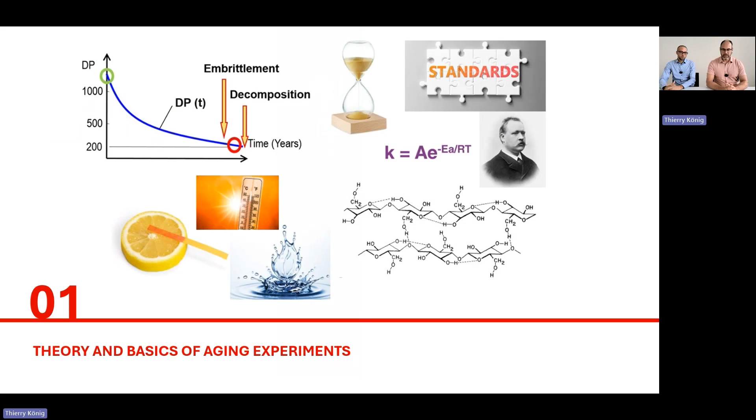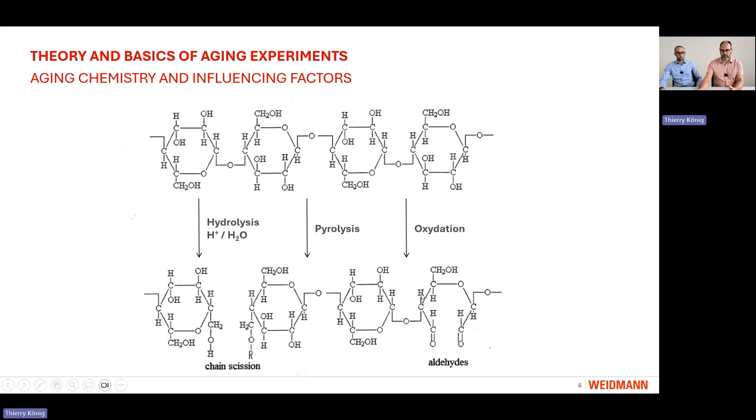The first name that is dropped when it comes to aging chemistry or reaction kinetics is Svante Arrhenius. Swedish man, born about 150 years ago. He was Nobel Prize winner in 1903, and his main interests were kinetics, electrolytic dissociation, meteorology.

So he was one of the first men that mentioned the greenhouse effect already more than 100 years ago. He also studied physiology and cosmology.

What was his main achievement? It is the so-called Arrhenius equation. The Arrhenius equation describes how fast a chemical reaction happens. Aging of cellulose is also a chemical reaction, and we can describe this very nicely with this equation here.

So we have here K, which is the velocity of how fast this reaction happens. We have EA, the activation energy, meaning this is the first energy that you have to put into the system so that the reaction will happen.

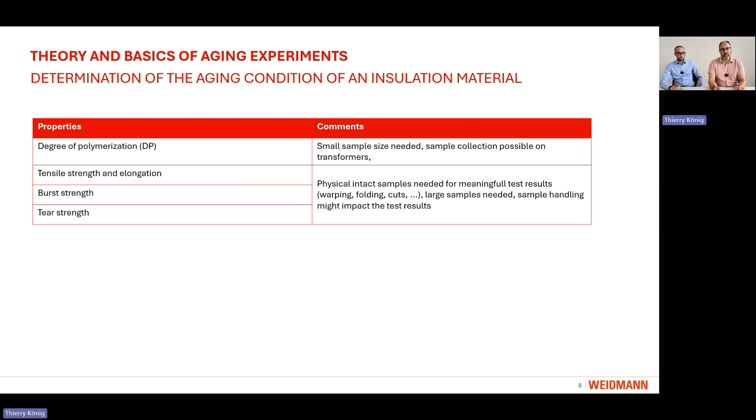And the other drawback of this property is that large samples are needed. So for a tensile strength, we need a paper strip of about 10 centimeters length.

Since the degree of polymerization is quite easy to measure, this has been the property of choice for estimating an aging of a cellulose molecule.

So the cellulosic insulation is made by cellulose fibers, which consist of cellulose molecules. The cellulose molecule is a chain molecule consisting of several identical single units. And the degree of polymerization is a measure for how many of these single units are forming this long chain.

So for example, when we have a degree of polymerization of 1200, then we have 1200 units that form the cellulose molecule. It is a measure for the molecule length, but not for the fiber length. So there is no correlation between DP and fiber length.

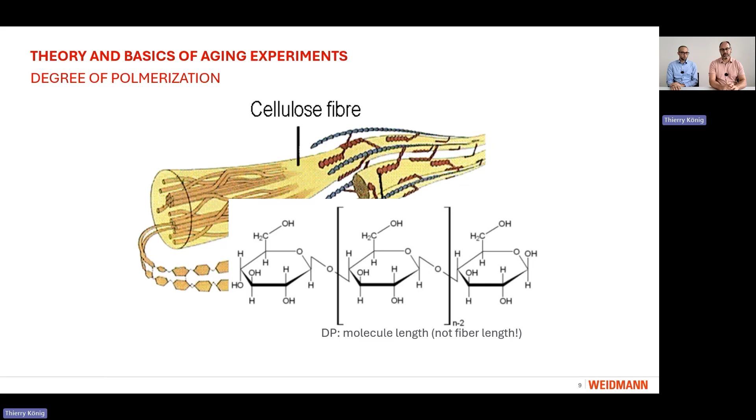These are different pairs of shoes. When we have now a new insulation with a DP of about 1200 and the transformer is installed into the net, the degree of polymerization is decreasing over time since the insulation sees temperature, sees oxygen, sees water, what you have mentioned before. At a certain time, the paper gets brittle and at the end, it will completely decompose.

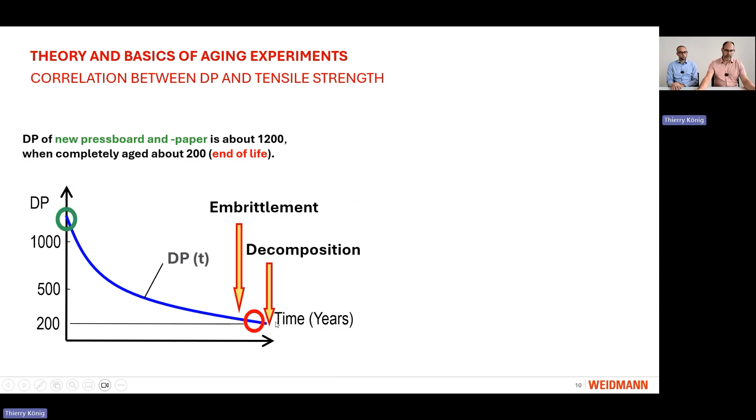What is now the correlation between the degree of polymerization and, for example, retained tensile strength? We see that at the beginning, the degree of polymerization goes down, but the retained tensile strength will still remain at the high level, but then suddenly drops.

Usually, end of life of insulation material is at a dP of about 200, which is at about 50% of retained tensile strength.

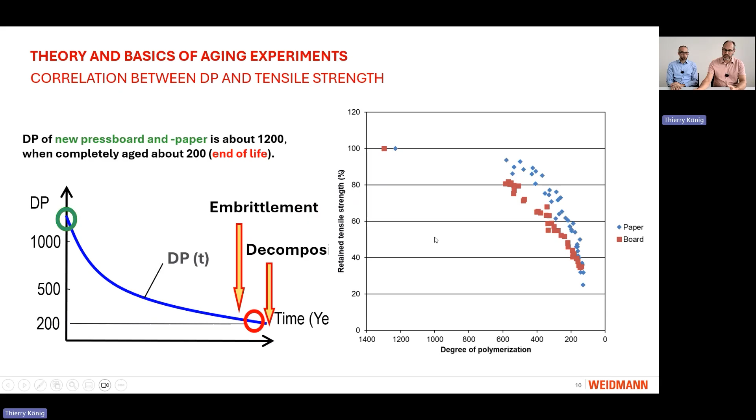We also have other correlations between dP and other properties, such as tensile strength, burst strength, and elongation. At the end, what really matters in the transformer is the mechanical property, because when you have windings that move, the elongation or tensile strength is required. dP is just correlated to these other properties via these graphs here.

Aging experiments are done according to standards. We have two different standards: the IEEE standard and the IEC standard, which are quite similar, but there are main differences. One difference is the industry-proven system used as a reference system. In the IEEE world, we have thermally upgraded kraft, TUK, and in IEC we have standard kraft paper. We also have differences in the liquid to solid ratio, in the aging temperatures, aging times, and the end-of-life criteria. The differences are not that big, but due to this, we can also expect differences in the final result of the aging experiments.

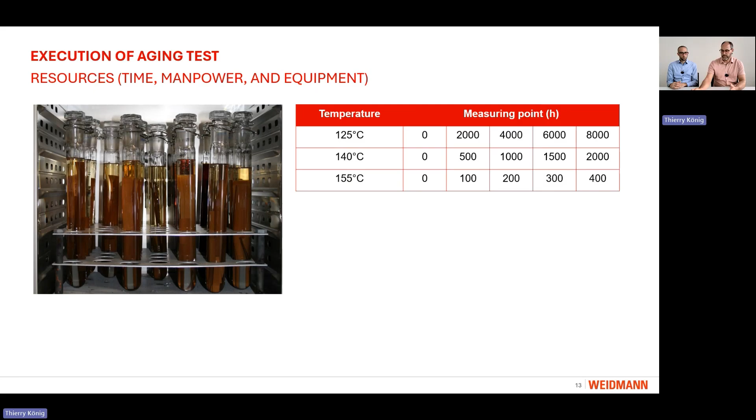Here are some important factors that may influence the result of an aging experiment. One is the choice of aging test vessels - we can either do it in glass tubes or in steel tubes or steel vessels. One is not equipped with a pressure relief system, one is, so this can of course influence the result. Temperatures that are chosen can have an impact on the result, and also which property you choose for evaluation of the aging status of the insulation.

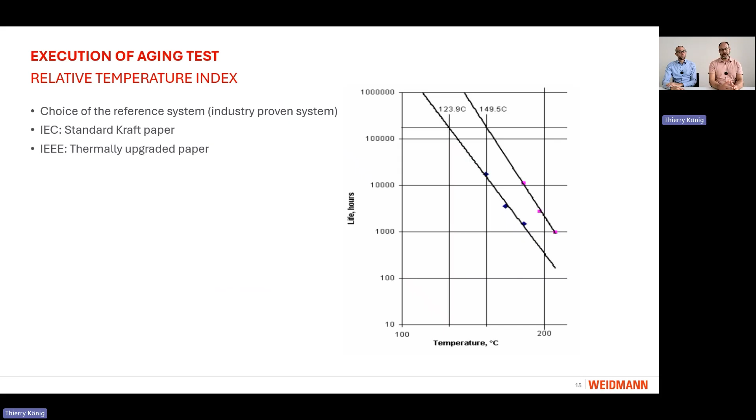At the end, what you calculate is a relative temperature index. The choice of the reference system, this industry-proven system, depends on the standard that you use. As I mentioned before, in IEC it is a standard kraft paper. In IEEE it is a thermally upgraded paper, which contains dicyandiamide, and depending on the amount of this chemical, the aging is different, which means you can also have differences in the temperature index that you calculate at the end of the aging experiment. Therefore, it's very important that standards are followed and that you also indicate what you have used.

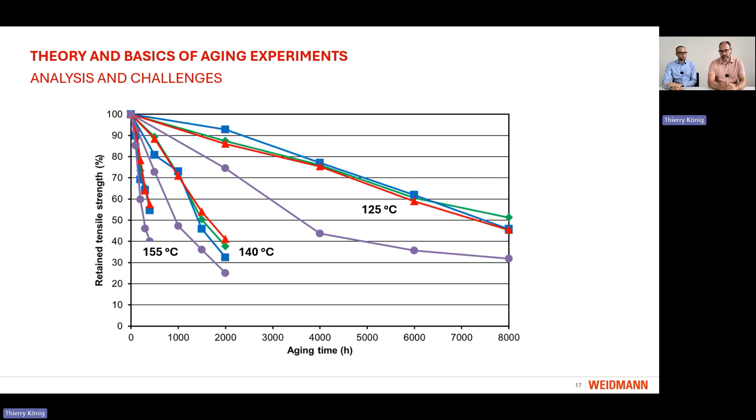At the end, what we get, and what was also used by Arrhenius, is this linear plot here. So we have 3 different temperatures with according times in a logarithmic scale, and we can extrapolate now from this 7000 hours that we have used to a transformer lifetime, which was here chosen as 150,000 hours, or about 17 years. And you can go down to the x-axis and see what temperature this means, which is now, in this example, 98 degrees.

One challenge here is that these points have to be accurate, because you're extrapolating to much longer times. What happens if this point, for example, was not here but a little bit lower? You see that the slope of this curve changes, and then the error up here can be quite significant. Therefore, it's important that everything is verified and no failures are made.

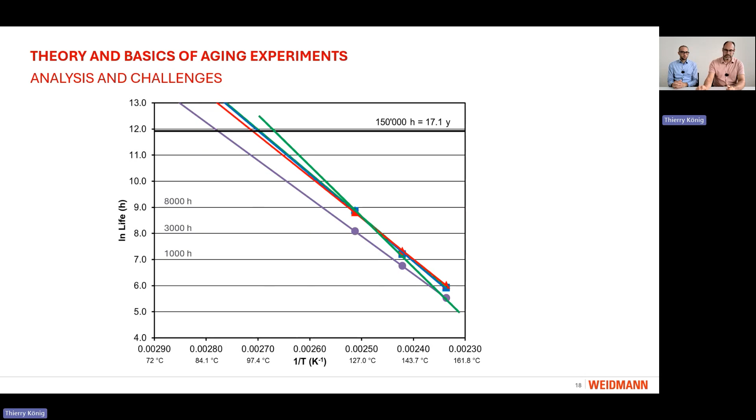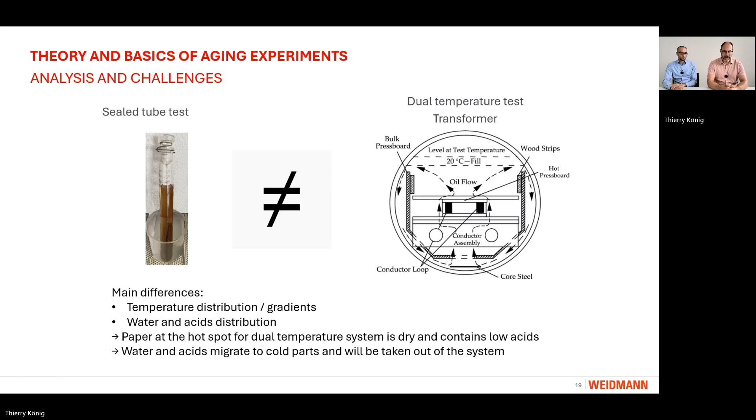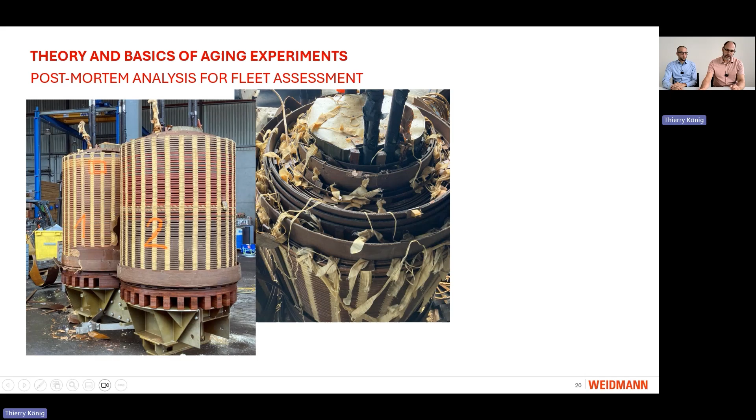This is a practical example of what you can do with these Arrhenius equations for the aging. Let's assume that you have a fleet of transformers, very similar transformers, and one of them broke down, so you have to dismantle it. What you can do is take samples here in the winding at different positions. You can measure the degree of polymerization and estimate the aging of your insulation.

For me personally, I think that's a very easy analysis. It's quite a cheap analysis, and what it helps with is really to estimate afterwards the aging of the rest of your fleet in your network.

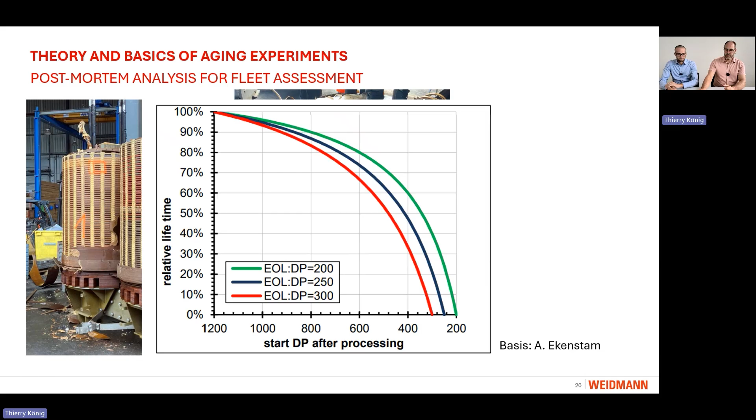So that was the theory, and now I hand over to Thierry, who will tell you more about practical examples. Thank you, Lars, for this first part, highlighting all the aspects which need to be taken into consideration when we perform aging experiments.

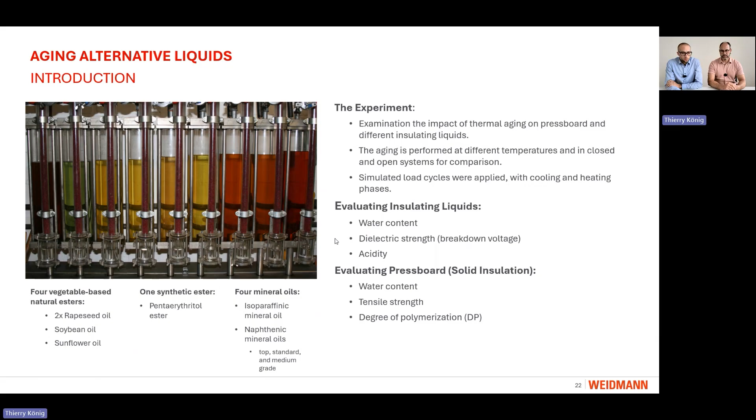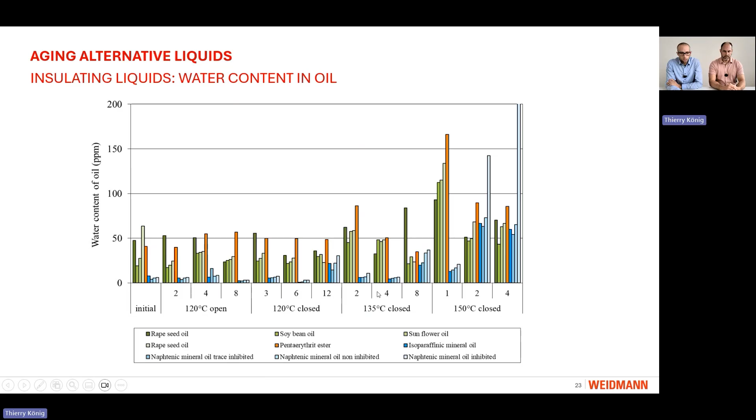For the water content in the ester liquids, there can hardly be seen an impact, but in the 135 degree closed system and 150 degree closed system, we see at the first moment the water content in the esters increased, and after that it starts to decrease. Also here, more extreme at 150 degrees, it's higher in the beginning, and after that we see a decrease. The mineral oil in the closed system also increased over time.

When we have a closer look at the 135 degree closed system, what happens here? We can see an increase from the synthetic ester and the vegetable-based ester, and from a certain point we see this hydrolysis effect starts.

So we have from this moment a decrease in the water content of these ester-based liquids, and in the mineral oil the water content is increasing over time.

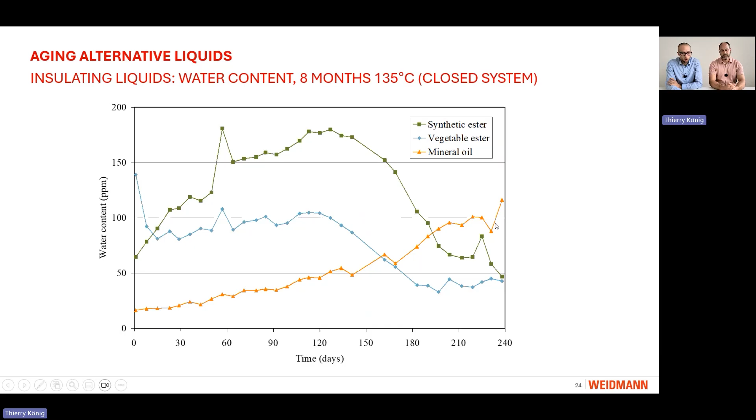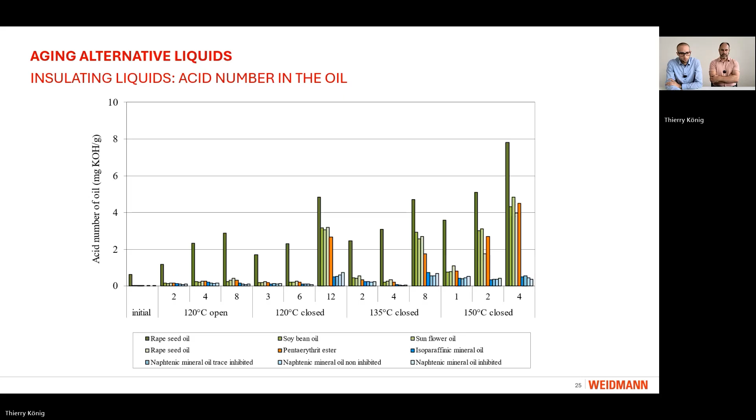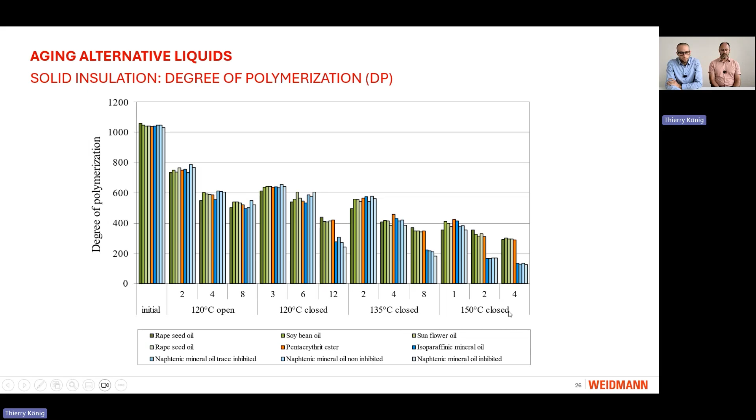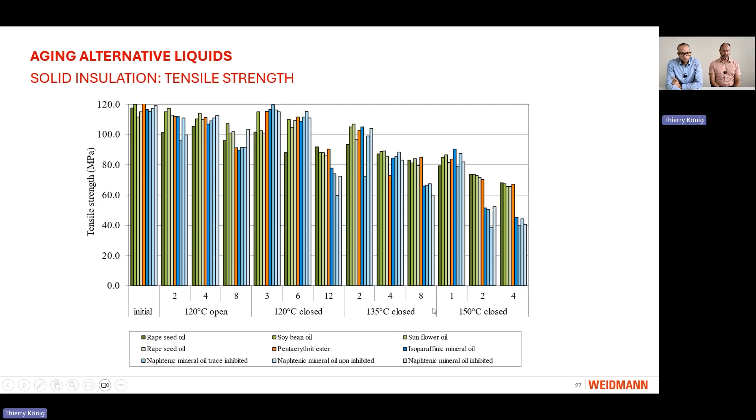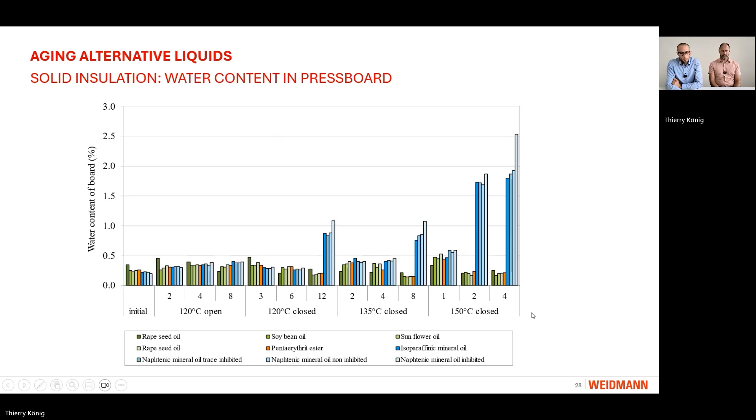So the conclusion out of this experiment: in the ester liquids, the water reaction slowed the aging over time. It was depending on the temperature. In the closed system, the ester liquids consumed the water through this hydrolysis, especially at higher temperatures, and reduced the cellulose deterioration.

The ester hydrolysis, on the other hand, produced long-chain fatty acids, but there was no accelerated pressboard aging observed in this experiment due to this acidity content, and also no effect of this acid number on the electric strength of the mineral oil or the liquids.

The electric strength of the insulation liquids was mainly influenced by the water content. In this experiment, we analyzed 4 types of mineral oil, so 4 types of quality, and we could not really observe an effect on the aging rate.

The pressboard aged in the beginning at the same rate in both ester and in mineral oil, but then, caused by this hydrolysis effect, the aging was a little bit reduced in the ester liquids.

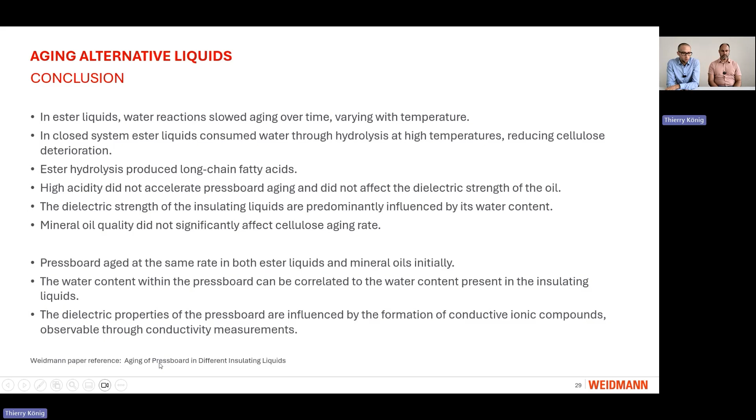The water content in the pressboard can be well correlated to the water content in the insulation liquids, and the dielectric properties of the pressboard are also mainly influenced by the water content, and that could be observed by the conductivity measurements of the pressboard. This experiment is also published in a paper from our side named Aging of Pressboard in Different Insulating Liquids.

The next experiment I want to present is about laminated materials. A past study revealed that aging of laminated wood generates a higher acid content and higher water. Therefore, an additional experiment was developed to analyze the impact when we age multiple materials in the same vessel, and focused on what happens to the paper in that test vessel.

For that, we used 4 types of test vessels, and in each we have multiple materials like kraft paper, low density board, high density board, and also copper and steel. The only difference between these 4 test vessels is: in one we have only high density board, so no laminated material; in one we have casein laminated material, one polyester, and one laminated wood.

We also then applied to these test vessels an aging at 125 degrees, 140 degrees, and 155 degrees to see what is the impact on the paper insulation.

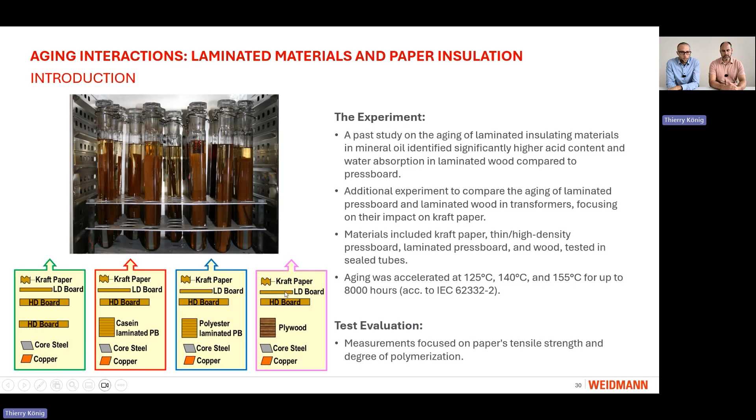Here are the results of the DP of the paper, which was aged together in green without any laminated material. In red, we can see the aging together with the casein laminated material. In blue, the one with polyester, and in purple, the one with laminated wood.

We can see here the degree of polymerization of the paper is already at the first measurement lower compared to the aging together with all other materials. So the aging of the paper was faster when it was aged together with laminated wood, and that could be seen at all temperatures.

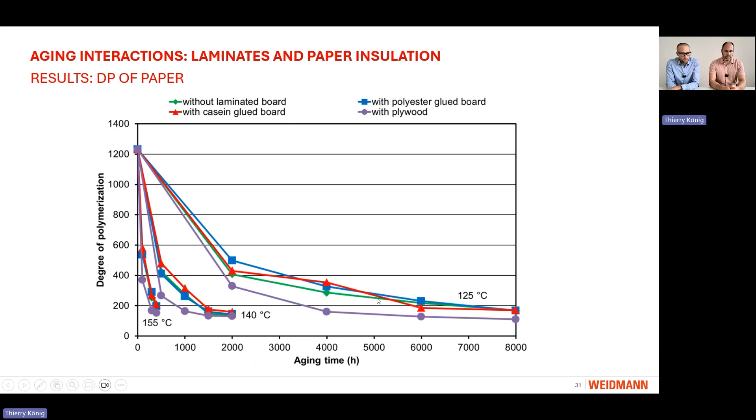Then the retained tensile strength, what does that mean here? Here we also can see the same effect. The retained tensile strength is lower when the paper is aged together with laminated wood.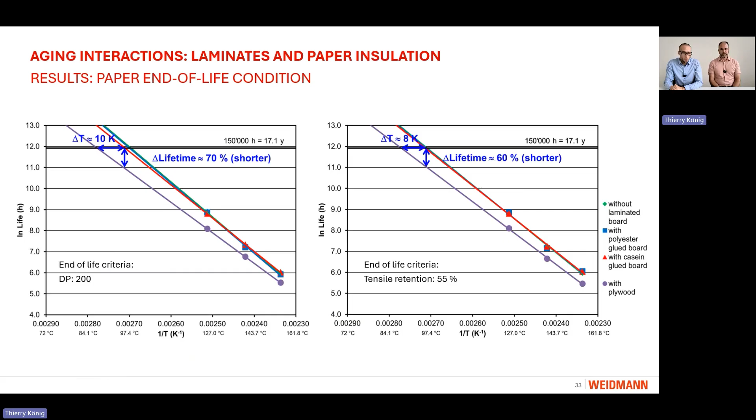So the conclusion from this investigation is that laminated pressboard better prevents the aging effect on transformer paper insulation compared to laminated wood. Plywood has an acceleration effect on paper degradation. Then regarding the lifespan, we have an impact when we use plywood instead of pressboard material. Therefore, the recommendation is to use laminated pressboard to have a longer lifetime of the transformer.

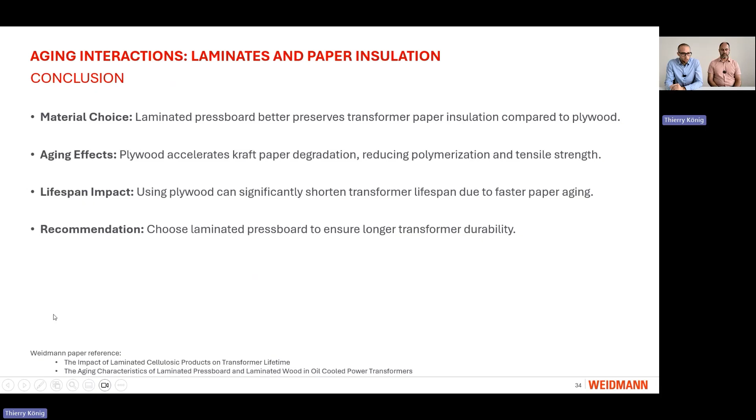This investigation about laminated material and aging is presented in these two papers.

What did we not cover so far, but I like to mention here, is what happens to the dielectric properties when we do an aging experiment. So for this, I picked some experiments and plotted them together here to understand what happens to the dielectric strength of pressboard and paper, and also to the loss factor.

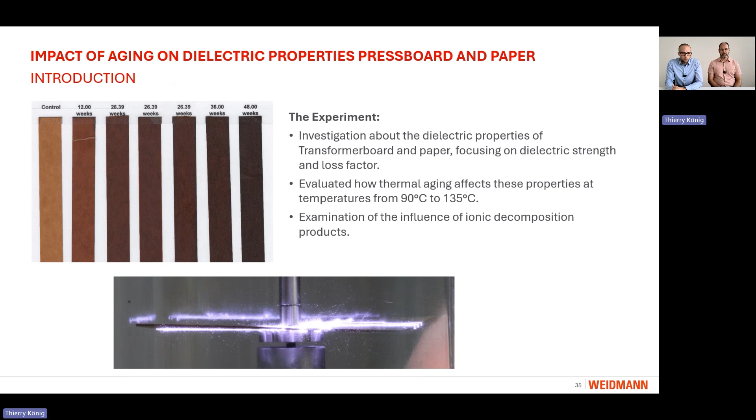First we have a look at the loss factor. Here, transformer board with high density and low density was aged at 90 degrees, 105, 120, and 135 degrees. We see that when aged at lower temperatures, we can hardly see any influence, but when aged at higher temperatures, there is a strong increase of the loss factor. This is mainly caused by the water content in the pressboard caused by this aging.

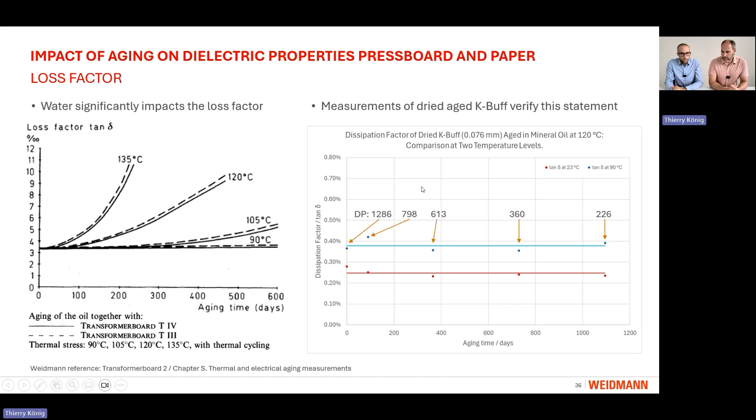To verify that this effect comes from the water content, we aged some K-buff material at 120 degrees. Then after this aging we dried it in the oven, oil impregnated it again, and checked the dissipation factor of this aged material. We can see here that the DP value is reduced because we aged up to 1,100 days. At the end, we reached nearly a DP of 200, and the dissipation factor is still below 0.4%. So we could verify that the aging, the DP value, has no effect on the dissipation factor. It only comes from the water content.

What about the dielectric strength? In this experiment we applied impulse voltage on aged transformer board. We could not really observe an impact on the dielectric strength of this material. Again we aged K-buff at 120 degrees, then dried the K-buff after the aging experiment to also verify that the DP value has no effect on the dielectric strength of the aged paper. Here too, we reached the same values at DP 200 for dielectric strength as we had in the beginning.

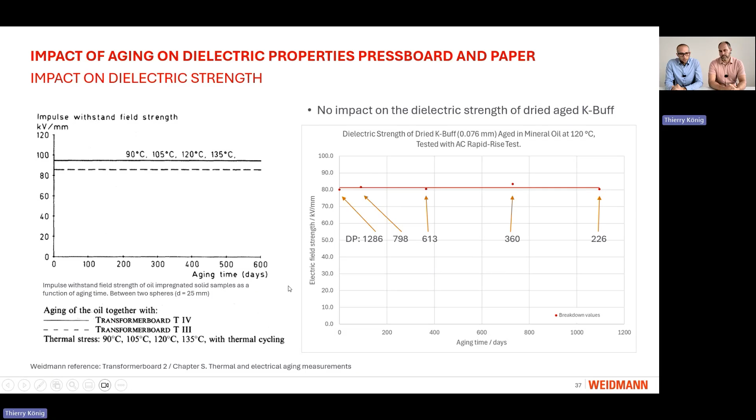So we can say as the transformer board ages, the loss factor tends to increase, but it is due to the water content in the material. The transformer board still has quite a good dielectric strength. A high water content is needed to reduce the breakdown strength. So the paper and pressboard itself control the effects of aging and preserve the dielectric properties, but the dielectric strength, or breakdown strength, is mainly influenced by the water content.

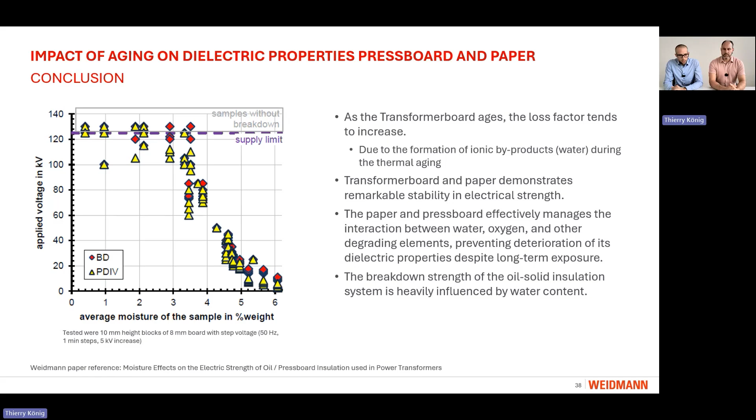So these are a few experiments from our side, and with this we are at the end of our presentation. Thank you very much for listening.